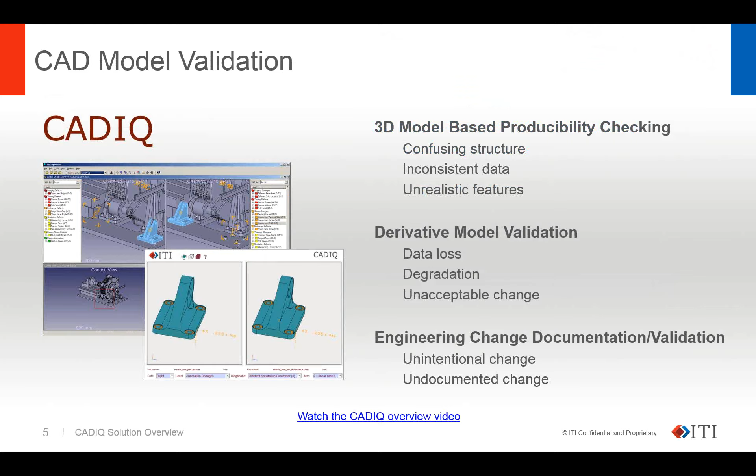But a good question that comes up at the beginning is, why would you want to validate your CAD files? And really, we'll go back to those three buckets to answer that question. First of all, CAD files, as you well know, can have defects in them, and some of those defects are caused by modeling practices, and other ones just little idiosyncrasies of the CAD tool and how it reacts to different types of geometry that you're trying to create.

So if you're using Creo and you have to share files with suppliers or customers that are in an alternate format such as STEP or any of the other formats out there, you want to be sure that the data you're giving those other contributors to your value chain is accurate, and there aren't any differences between what you have in your CAD tool and what appears in the derivative version of that.

And then finally, as models go through the process, or as designs go through the process of completion, there are a lot of different changes that happen. Some of those changes might be related to manufacturing, some of them are simply design changes to make the product function better, but whatever the case, the ability to see exactly what those changes are can sometimes be difficult to spot or difficult to communicate.

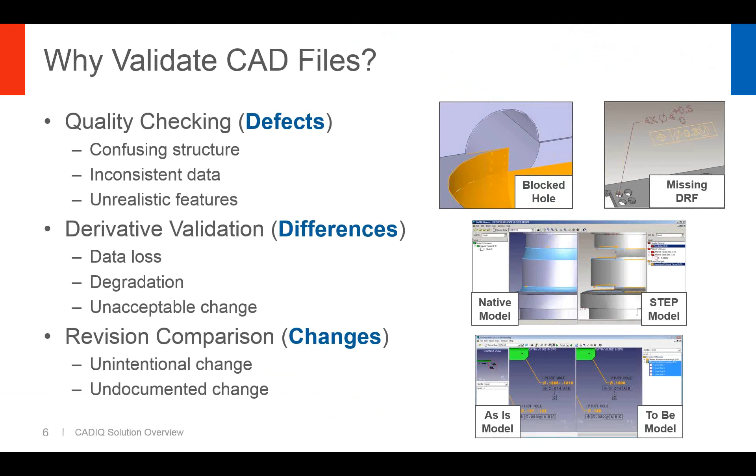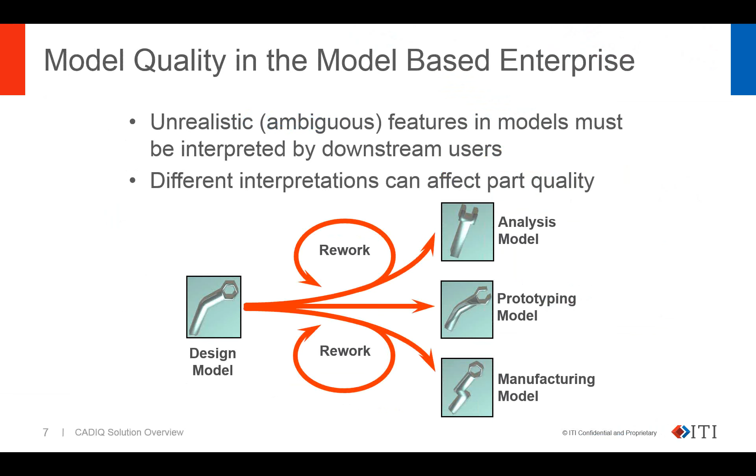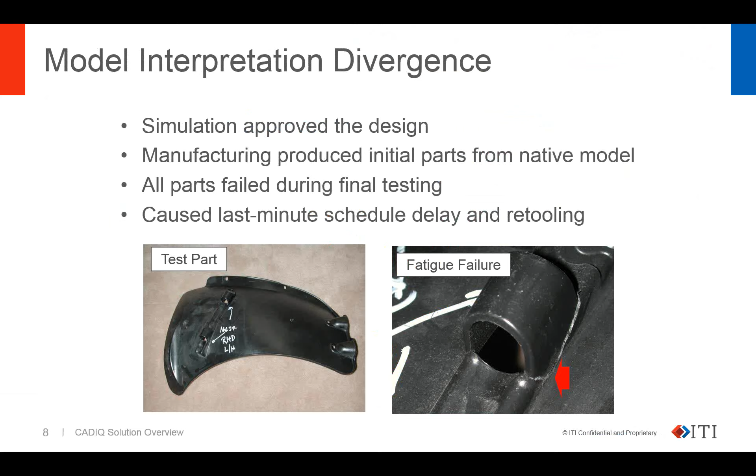We have a zoomed in view on the right-hand side where it shows some fatigue failure due to some stress concentration that happened on the part as it was placed in its functional environment. So let's take a look at what actually happened to that. And this gives you your first look in today's webinar at CADIQ and how it looks to the user. So what we're seeing here is a picture in CADIQ of a quality check where we're spotting a zero thickness surface, a little sliver, if you will, that can happen pretty easily in CAD tools when you have draft angles and radii and things like that coming together.

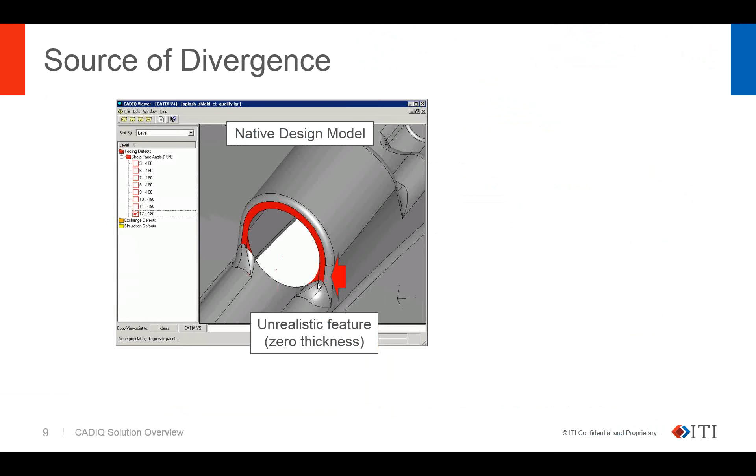You can often get little sharp edges. You notice that we have a radius in place there that would take care of that stress concentration, but as the product went through manufacturing and simulation, it got simplified a little bit to the point where that unrealistic feature actually was not accounted for in the simulation, but since manufacturing worked off the original model, we actually got a situation where we have no radius on the actual part that was built, and because of that, we have that stress concentration and a failed part.

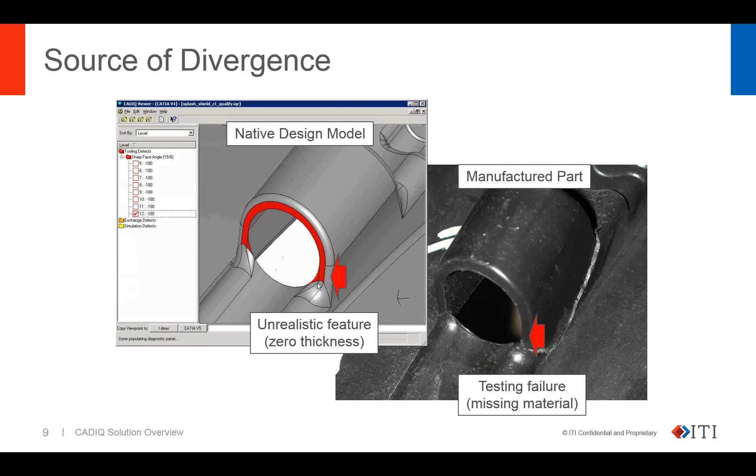So a tool like CADIQ can alert you to these kinds of issues with geometry that if you were to inspect this model visually and shade and spin it on the screen, you might not necessarily see these kinds of defects, and therefore you could be faced with a problem like we're seeing here.

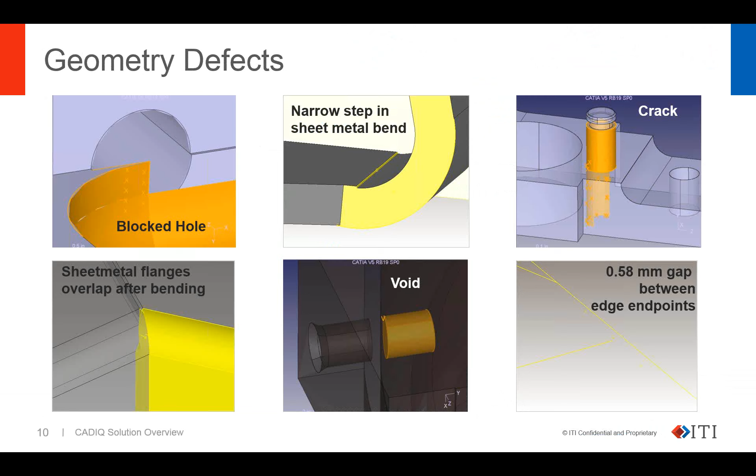That's what we call graphic PMI. There are a couple of terms that you may or may not be familiar with. One is graphic, the other is semantic when it comes to PMI. So graphic PMI just means that a human is going to look at that and interpret that information. This defect isn't important in that case, but if we're trying to program a coordinate measuring machine using this information, we then need semantic information, in other words, interpretable by a machine. And the machine interpretation of this is going to miss that surface that should be included in that profile.

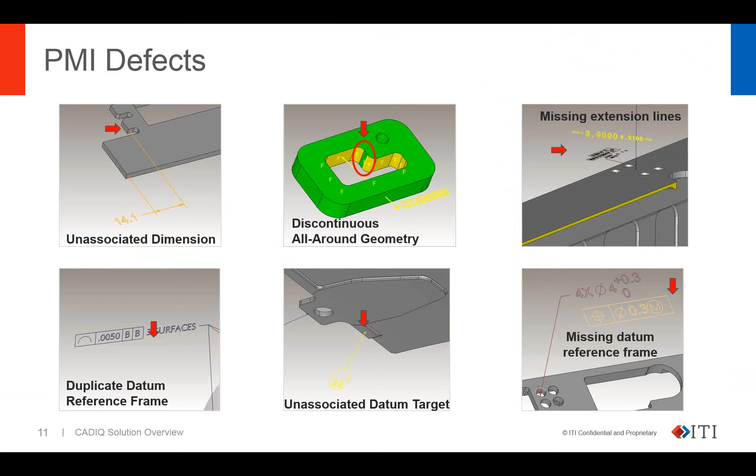We're going to kind of switch gears here and talk about derivatives. We were talking about individual model quality. Now we're going to change gears and talk about derivatives, meaning alternate formats that are produced from the original CAD model. Wherever you see the brown colored ovals here, that's an opportunity for a derivative to be produced, and also an opportunity for errors to be introduced in the data.

So as the data comes from a supplier or maybe from a legacy system into the CAD tool, you may have some translation that takes place there. And then downstream of the design tool, transformations may take place for visualization, for manufacturing purposes, or maybe for archiving purposes. And many times those three deliverables are in different formats. So the question becomes, are these models all equivalent? If we consider the model in the middle to be the actual master model, we want to ensure that anything downstream from that is going to be equivalent to that master model, so we don't have the kinds of problems that we saw with the example earlier.

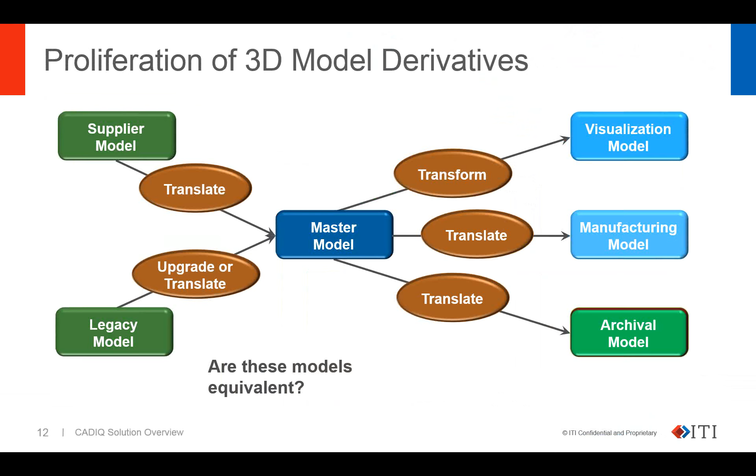So what kind of things can we spot in CADIQ? Here's another look at the user interface of CADIQ. And by the way, I will show a short demo at the end so you'll get a feel for what it looks like in real time. But here we're seeing the master model on the left and the derivative model on the right. And you can see here a significant difference between those two. And that's one that would likely be picked up on a visual inspection.

But how often do you really display your CAD model and your derivative model side by side? That doesn't in reality happen very often. We tend to trust that process, but we can see by this example, and I'm sure you've seen some examples in your day-to-day work, where derivatives actually are not equal to the original model. So here we're showing a rich graphical interpretation or visualization of that difference and giving you very clear information about what the difference is.

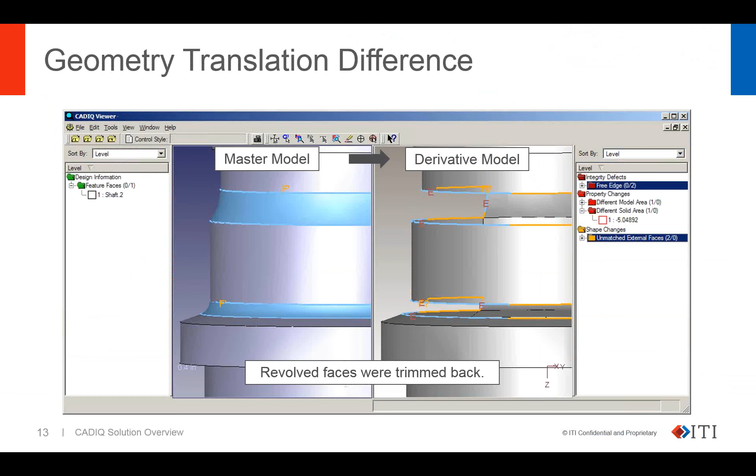Another example here is with respect to an assembly where we have a component of the assembly, everything's geometry is completely accurate, but the component of the assembly has changed position as a result of the translation to the derivative file format. So here, I'm not sure if we're seeing a step file on the right, but most likely it is. It's covered up by those labels. But here we're seeing that comparison, and we've got a component that has shifted. And the busier the assembly gets with components, the less likely it is that a person doing a visual inspection is going to see all of these potential changes that could happen.

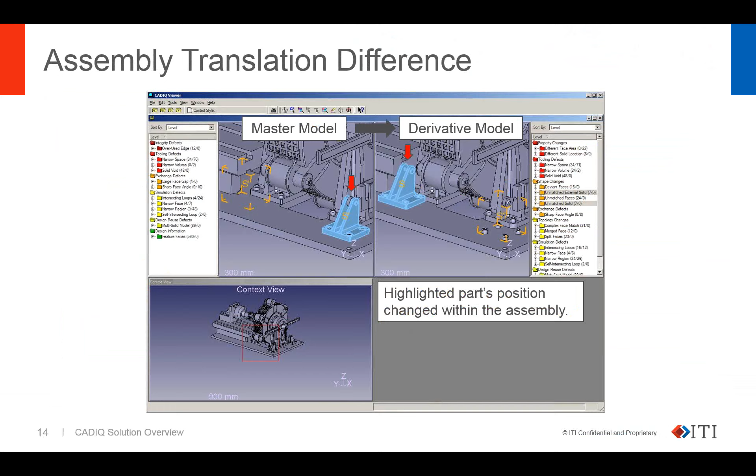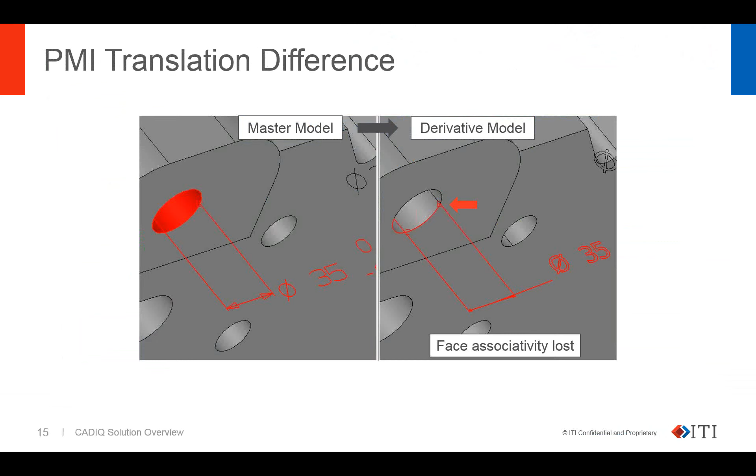Here we're looking at a difference in PMI through the translation process. So we see a couple of things happening here. The face associativity is lost. On the left-hand side, we could see we selected the dimension and the faces on the model inside the hole there are highlighted, and we've lost that associativity on the right-hand side. You can also see a change in the font there where we have sort of a block type font on the right, which is different than the font that was in the original model, which may not be as important. But again, if we're talking about that semantic PMI where we're going to use a program to interpret this data, then this loss of associativity becomes very important.

We also have here where there's actually some information missing. We had a statistical symbol in the PMI on the left, and that has disappeared along with some size changes and font changes in the PMI itself. So we look at these in terms of parts, assemblies, and PMI, comparing all of those things to make sure that what you get in your derivative file is equivalent to what you had in the CAD file.

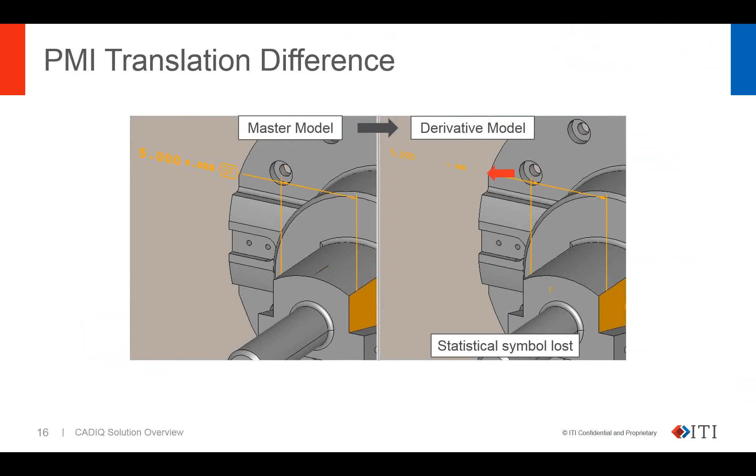Some other examples here where we've lost some cross-hatching in a view, the location of a balloon has changed, and in the bottom example, a circular balloon has changed into an octagonal balloon with facets on it there. So all these things can be spotted easily and highlighted with an automated tool like CADIQ, whereas the visual inspection may not catch all of these.

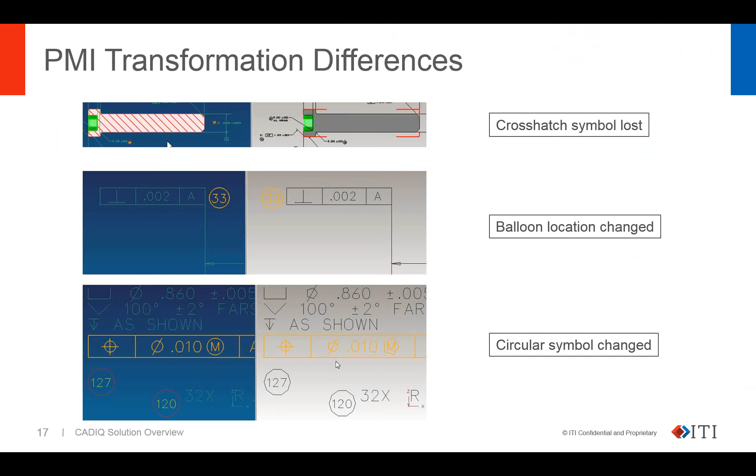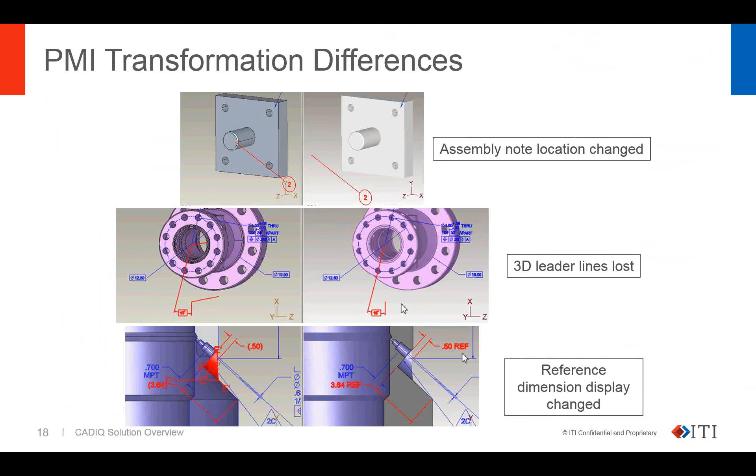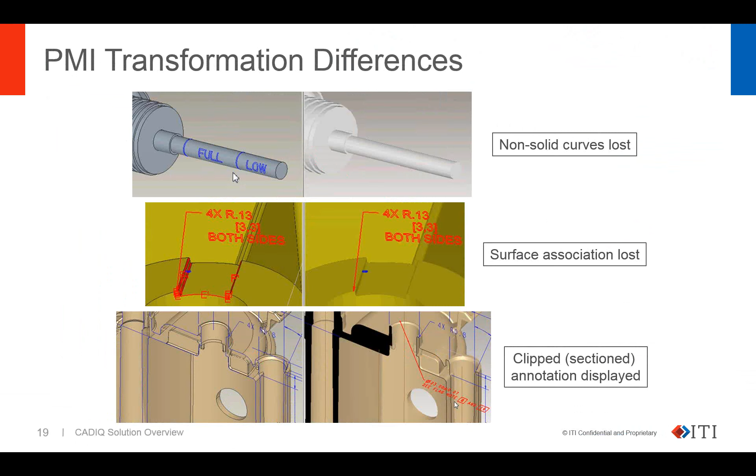And here's some other PMI differences where you can see the left and the rights are different, and I won't belabor the point and go through all those differences, but on looking at these images you can see that there are some differences between the left and the right which may not be immediately apparent on a visual inspection. And just a few more examples here with surface association being lost and different elements being lost in the process of translation.

Now the third, so we've talked about model quality, initial model quality, with features that are appropriate for the intended purpose of the model. Then we moved on to verifying or validating derivative formats of the model, and now we're going to shift gears again and talk about that third bucket or that third area where CADIQ provides value, and that is documenting or spotting model revisions.

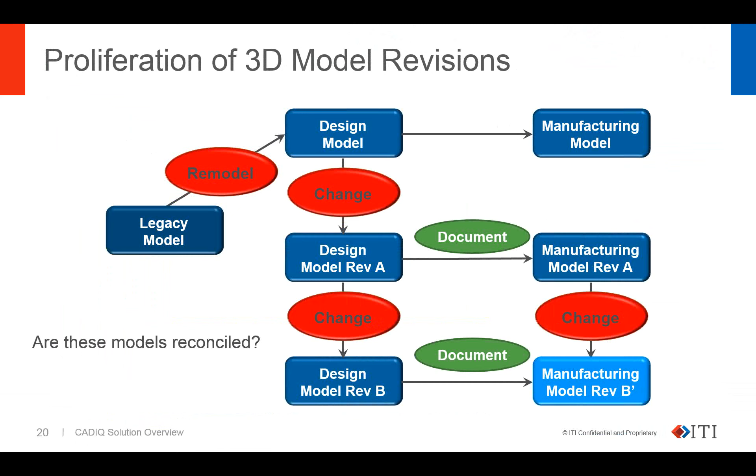So here, if I build this out, you can see like that graphic I had up before, we have a number of opportunities where changes might be made to the model. Starting over on the left, going from a legacy model to the current model, we may make some changes there. Changes may just be a result of different revisions of the model as it goes through the design cycle. There may be changes associated with manufacturing, and manufacturing may have a couple of different revisions of the model based on their process needs. So each of the red ovals represent an opportunity for change, and therefore also represent an opportunity for changes that either are unintentional or for whatever reason are undocumented simply because they weren't spotted or known about by all the parties involved.

So a couple of examples from CADIQ here then where we've got an as-is model on the left-hand side and the revised model on the right-hand side. Now, the idea here is that we've changed the thickness of the geometry. You can see the orange highlighted geometry there, and what has happened is the hole depth did not change with the rest of the model. So we're seeing some extra geometry down there at the bottom of the hole. And again, visual inspection, particularly if you have that model shaded, may not be immediately obvious and may be missed entirely, this type of a defect. I guess I won't call it a defect, but this change that actually does sort of result in a defect here based on the fact that that hole should go all the way through.

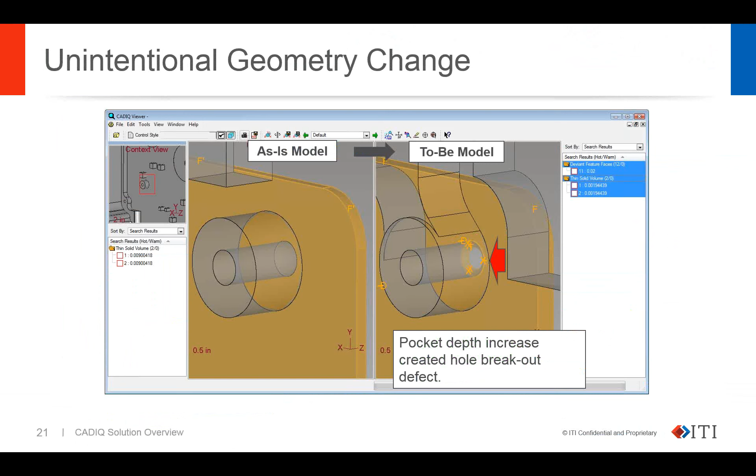Here we're looking at a composite layup where we have differences between the model, and it's pretty significant here. So these are pretty easily visualized. You see the composite geometry was changed. It was intentional and it was documented, but there were some attributes associated with that.

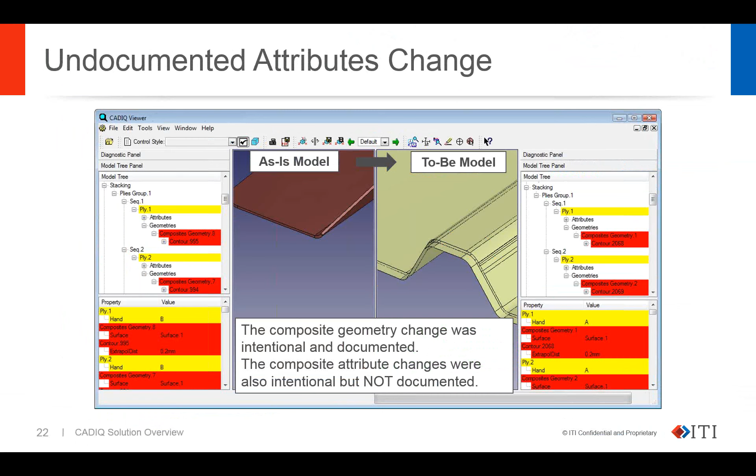In other words, text parameter type information that's not geometry that is captured with the model that may be very important for automated processes related to manufacturing, and those items were intentional, but they weren't documented. So CADIQ spots those and allows us to then somehow document those and communicate those to downstream users of this data.

Here we have, in the absence of a detailed drawing, we don't have a drawing to redline, so we give you the ability with CADIQ to actually produce a PDF. So one of the questions that actually may have come up in your minds as you've watched this is how do I communicate these changes? I find these things in CADIQ, and then how do I communicate that to the rest of my organization, most of which won't have access to the CADIQ tool? And the answer to that is that you can provide this information in the form of a PDF.

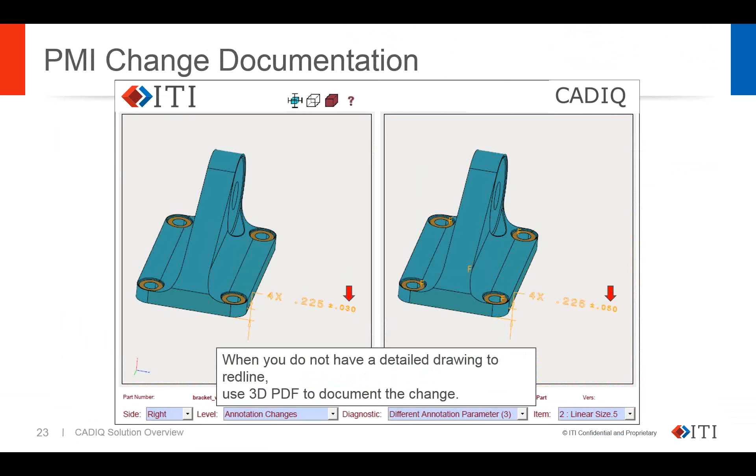So here you're seeing an example of that, and I also have a real, I'll say quote unquote, real example of that to show you as well. But all of the items that CADIQ spots can be included in this PDF report, and that gives you something that you can attach to the model and document the changes. And here again is one of those changes that might not be spotted immediately. We have a tolerance change from 30 thousandths to 50 and could potentially be missed by a human inspector.

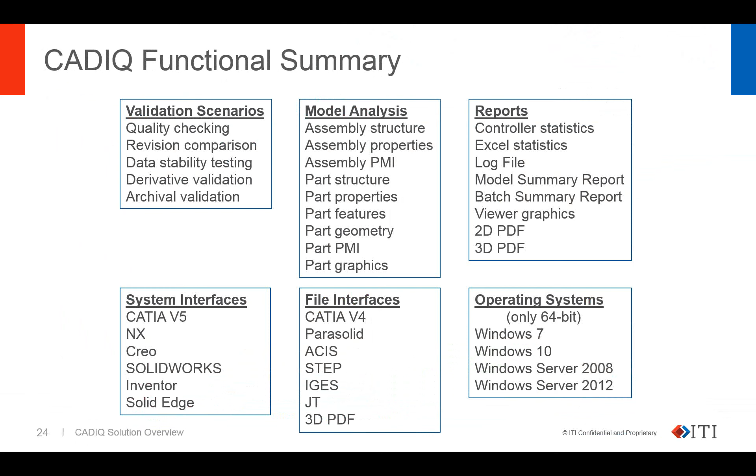And just as a summary, I won't read all of these, but this gives you an idea of the wide range of items that CADIQ inspects and gives us the opportunity to document with respect to the models and derivatives and revisions that you work with as you go through the design process. Probably most important to cover here is the system interfaces that we support, and you can see those in the lower left-hand portion of the slide, the CAD tools that we support for inspection of models in terms of quality, and then the different interfaces that we support for derivatives are listed there as well.

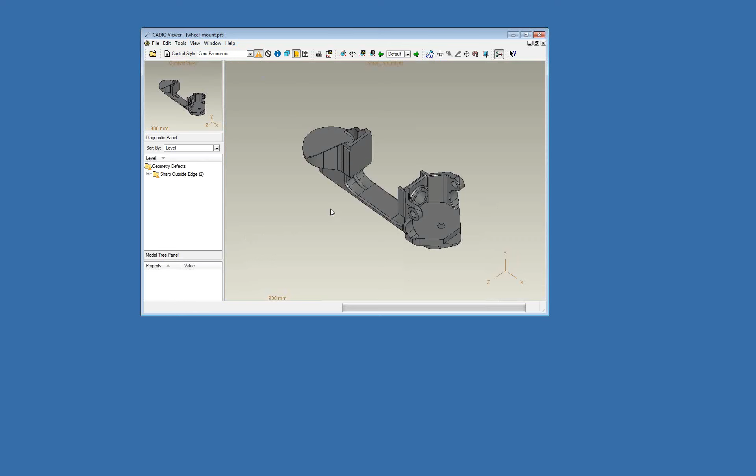Okay, so I'll take a few minutes now, and I'm going to switch gears here and change up the display a bit and show you what CADIQ looks like to the user. So here we've got a model where we're just showing, this is a quality check. So that was the first area that we talked about, showing defects in the model.

And just to give you an idea what that's like, well, let me back up here. The user interface is pretty simple here. You've got menus across the top, different icons that in many cases are duplicated in these menus, but different controls for displaying this model. For example, you could display it in wireframe if you want, or turn it on so that it's shaded based on what kind of information you're trying to query from this model that might be useful. We have an overall view up here in the upper.

I'm going to expand this bigger. Actually, that went way too big and spread across all three of my screens, so I apologize. I'm going to try to resize this thing. There we go. I'll stretch it out. I hit the maximize button and I have three monitors and it's spread across all three of them.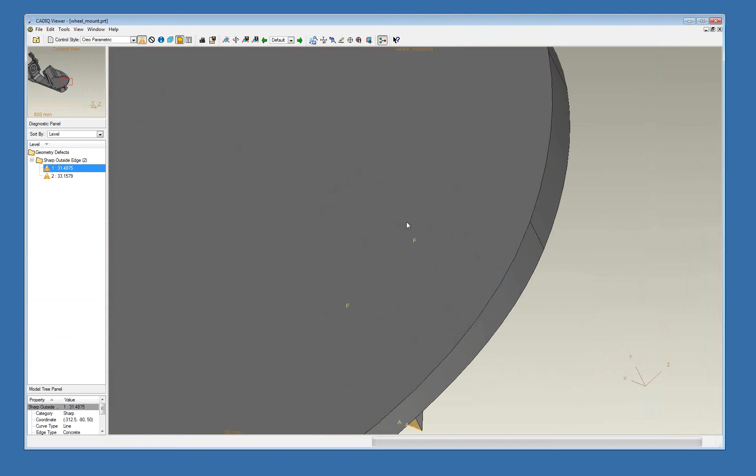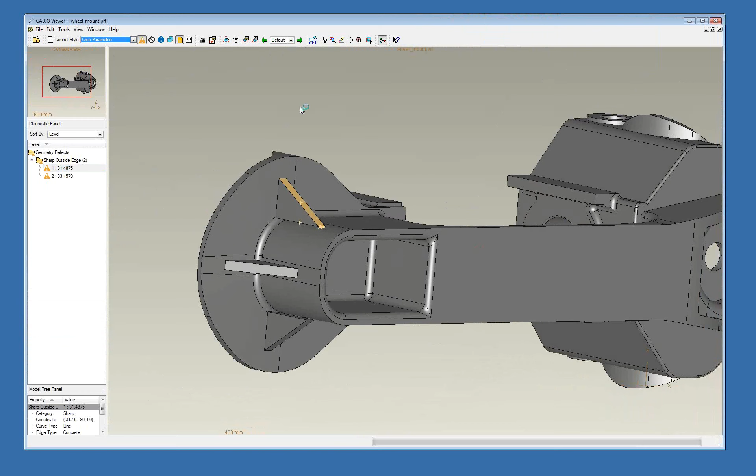So what we have here is an overall view of the model. So for example, if I zoom up on one of these items that CADIQ found, I see a zoomed up view of the model in the main screen, and this overall context view that we see in the upper corner here on the left tells me where I am in the model. And I can use the mouse wheel to roll back and forth and manipulate this model in different ways. By the way, if you're used to the way a specific CAD tool behaves, like for example, Creo, that's why I've got the control style up here set to Creo, but you can set it to any of these different CAD tools. And then when you're reorienting the model in CADIQ, you're going to have those familiar controls that work the same way as they do in the CAD environment that you're used to.

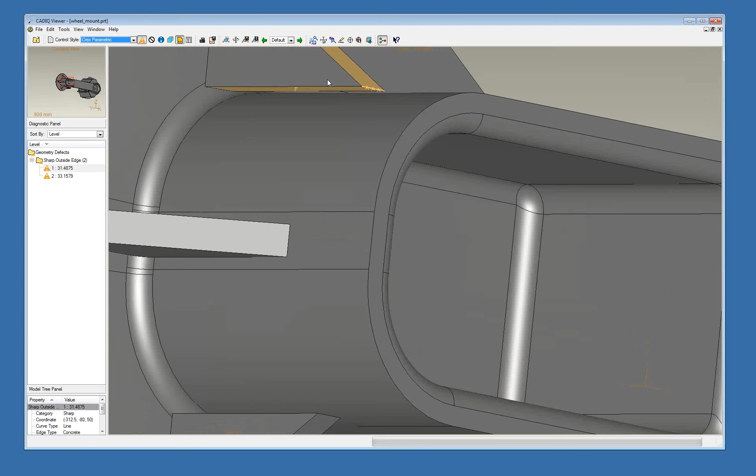So let's just zoom up here and take a look at what's going on. We have a sharp outside edge that CADIQ spotted. As you look at this model, as I rotate it around, there might not be anything obviously wrong until you get to this angle, where we can see this reinforcing rib doesn't actually touch the side of the part, and it results in what CADIQ finds as a sharp edge on the model.

Again, one of those things that when we're zoomed back like this, everything looks pretty good unless we look closely at it. So that might be missed, and you can imagine what kind of difficulties this would cause in creating tooling or machining this model. Now you might also be asking, how do I tell CADIQ what to change or what to spot, and can I adjust what CADIQ thinks is important based on what I think is important?

The answer to that question is in a set of configuration files that you can edit to configure CADIQ to ignore certain things that aren't important in your environment, or among those things that are important, maybe some are more important than others, so you have CADIQ mark those as more severe conditions. We refer to those as hot, warm, and cold, or if you want to use a traffic light analogy, it could be red, yellow, green, green being good, and on down to red being a significant item that needs to be fixed.

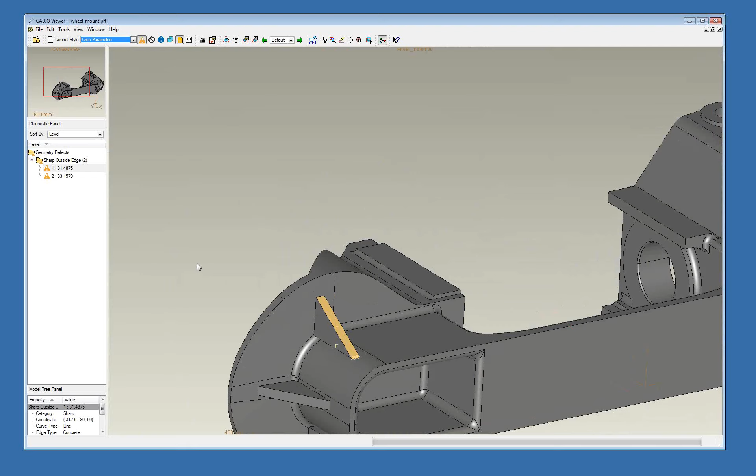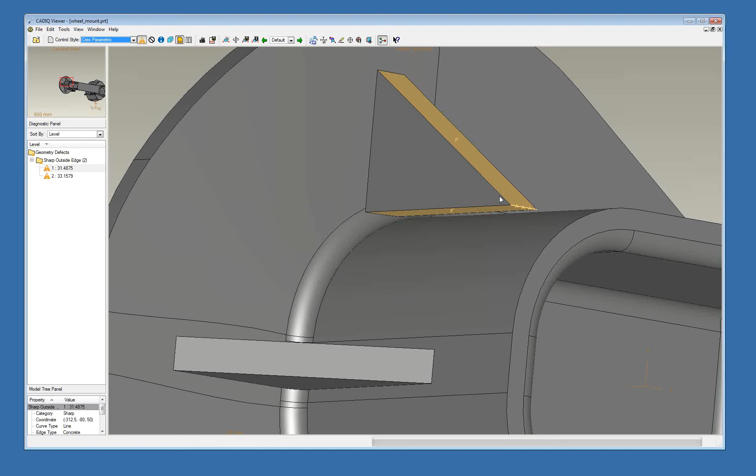So within those items that you do want information about, you can set different thresholds, so that what is considered a sharp angle in one company's environment may not be a sharp angle in another. So let's say this angle is 30 degrees here, and I set the threshold in CADIQ to say any angle that's 31 degrees or less is a sharp edge. It's going to spot that. But if I set that tolerance to be some different number that's higher than what I have here, or lower than this, then it wouldn't spot this as a problem. So the bottom line is you can configure CADIQ based on what's important for you to know about your models.

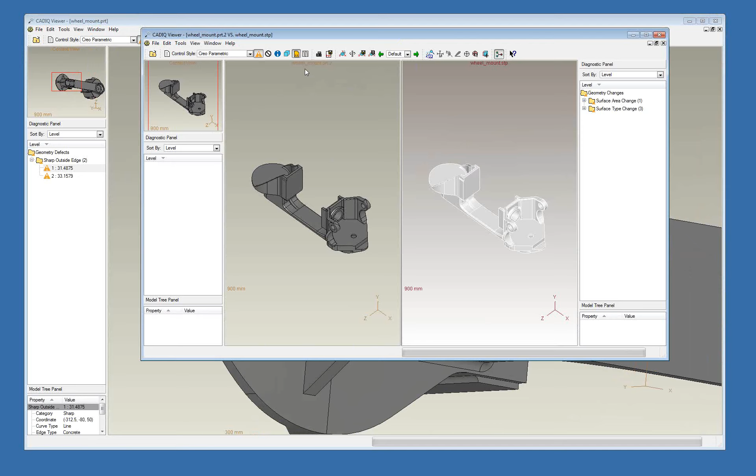Okay, so another example then, moving on to changes in a model. Here we have a derivative validation. I'm going to collapse that one window and make this a little bit bigger. So here we're looking at the differences between a part file and a step file. I'm not sure how it's coming through in WebEx, but at the top of each of these windows is the name of the model we're looking at. So we have a .prt on the left, and a step file on the right.

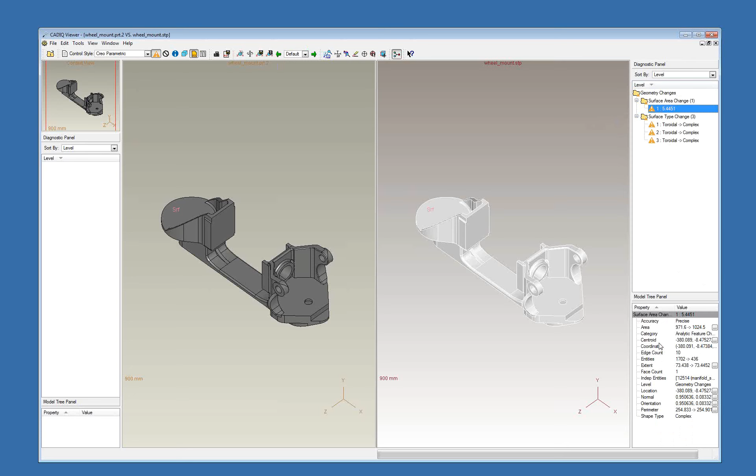And over in the panel, you can see the different items that CADIQ found in terms of geometry changes. If we expand these, we can see what they are. And as I highlight those, I also want to point out that there's a properties panel down here in the bottom right-hand corner that gives you a rich set of information about that change. Some of it may be very important, some of it may not be important depending on your application, but there's a nice set of information there that can be useful. Now, to zero in on changes specifically, you simply double-click that item in the tree,

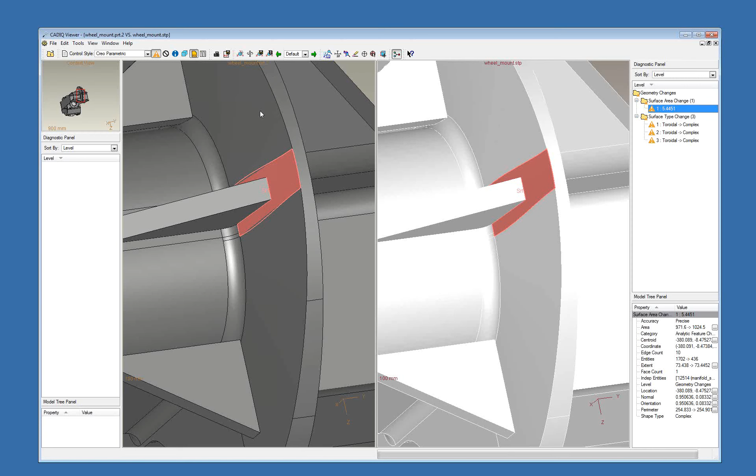and what we can see here is that we have a surface area change between the step and the part file. There are a couple of different ways it's shown. First of all, if you look over at the left-hand panel where we have the CAD model, you can see overlaid in wireframe is the step surface. The shaded surface is the surface that exists in the CAD model. We've overlaid the surface that resulted in the step file, and you can see there's an area change there.

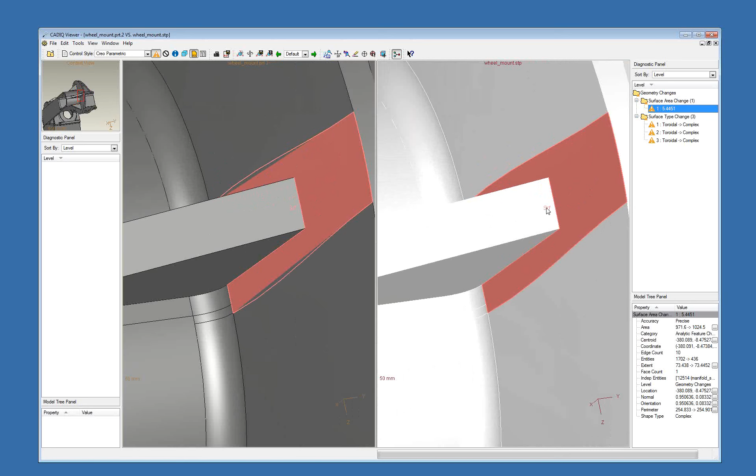And to get more information, you can either look over here in the diagnostic panel and see what that area change was right here in the list, or if you simply hover over the label of that surface, you can see the percentage of the change there. So we're just about 5.5% difference between the surface area in the CAD model and the surface area in the step model. Now that doesn't necessarily represent a change in position of that surface, but the construction as it happened in the step file is slightly different. We can also see that some surfaces, based on the translation algorithms, I guess you could call them.

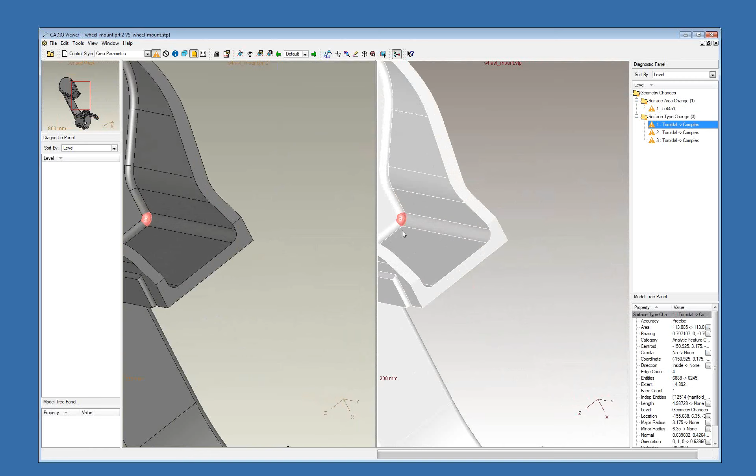I don't know how STEP does all these things internally, and I don't know all the mathematical terminology, but if it is important in your machining applications or other applications, maybe analysis applications, that this surface be of a certain type, we can see here that where it was a toroidal surface in the CAD tool, it became what STEP calls a complex surface. So if the entity types that you get in the STEP file are important to you, this is information that can be useful for making adjustments to your STEP file translation process, or simply being aware that there's a difference between these two formats.

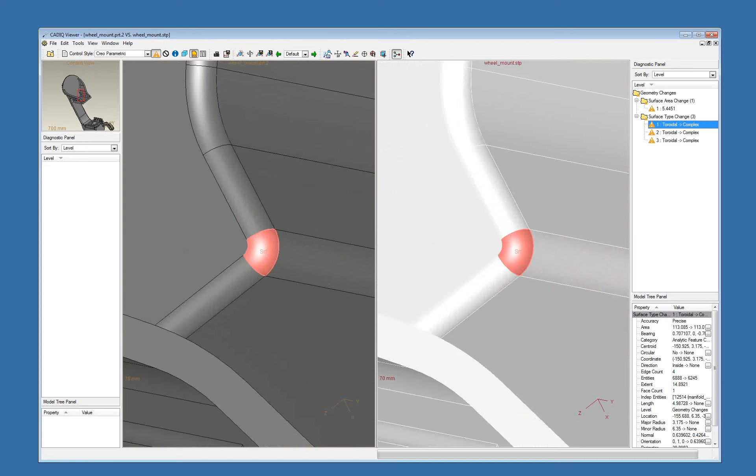Okay, and then the third example, I'll go ahead and collapse this down. Third example is comparing one revision of the model to another revision of the model. And again, I'm not sure how well this shows in WebEx, so I'll point out the fact that we have on the left side wheelmount.prt, and then we have wheelmount.prt.2. That would be the revision. And we're seeing those side by side, of course.

And as I mentioned before, this side by side visualization capability is really powerful. Again, I'll pose the question sort of rhetorically: how often do you really look at two models side by side in your CAD tool? You may do it frequently, but I've been around the industry for a long time, and I don't know of too many customers or users who actually do that very often. Usually it's a matter of markups and things like that. So here we're seeing two versions of the CAD model, and over in the panel on the right hand side, we're seeing what the changes were.

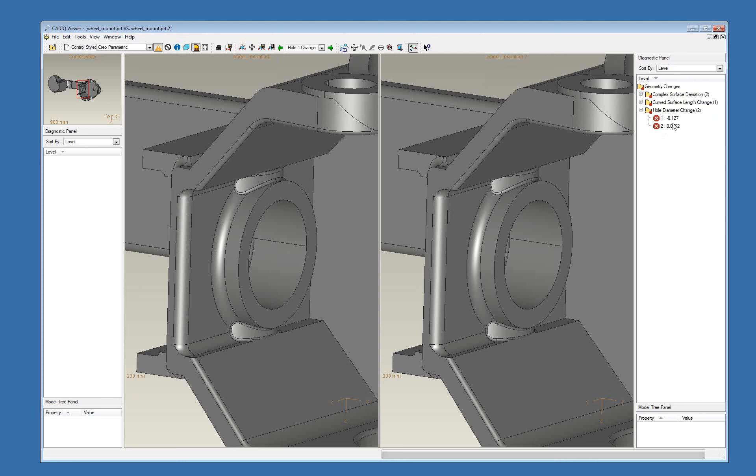So we've got three different categories here. We'll focus on a couple of them. First of all, I have a hole diameter change, two different indicators of a hole diameter change. And let's just double click on the one and we'll see where that is. We can see that this large hole in the central portion of the part there has changed diameter by 0.127. And again, looking down in the properties panel, we can see not only that diameter change, but other pieces of information about the position and condition of that cylindrical surface there.

By the way, I don't see any questions at this point, but if you're asking in your mind, what does CADIQ know about the features on the model? The answer is that we're analyzing only geometry here. So while we do use the CAD system to generate this geometry and to extract it from the CAD tool, we're only evaluating geometry, and we don't care if this is a hole feature or a round cut or an extrude or a revolve. That's important on the CAD side, but in terms of comparing revisions, only the geometry in terms of size and position is important. So that's what we're focusing on here.

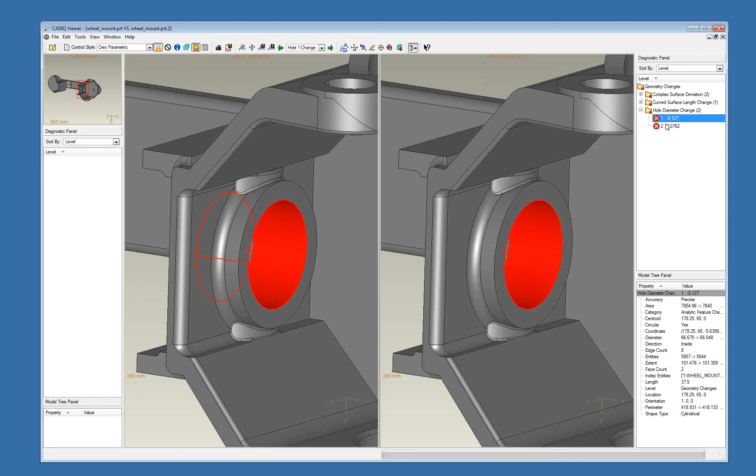Now, just like before, we can see the difference highlighted in the tree, but you can also hover over the label and we'll see that the diameter change is listed right there with that feature. Now let's look at the other one here. It's actually on the other side of the part. I'll zoom out a little bit. That zoomed up pretty far there. Let's kind of go over here to the other side.

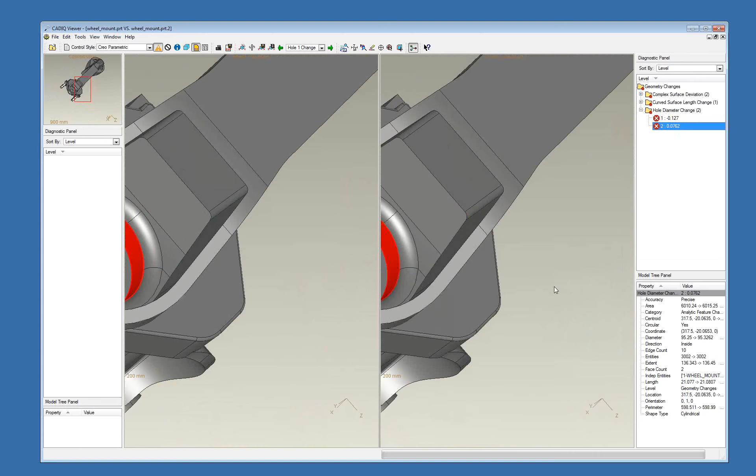And I mentioned before the idea of how do we share this information outside of the CADIQ user community, which tends to be fairly small, right? You're probably not going to have every CAD user in your organization evaluating models using CADIQ, but you will want to communicate that information perhaps to a very wide audience. And the way that's handled is when you are looking at the results in CADIQ, you have the ability, a couple of different ways to do it, but I'll just highlight one right now. Right up here, I have a Save as PDF button. Now, I can generate several custom views by zooming and rotating and capturing those views, and then include those views in the PDF report. And that's what I've done for the example that I'm going to show you now.

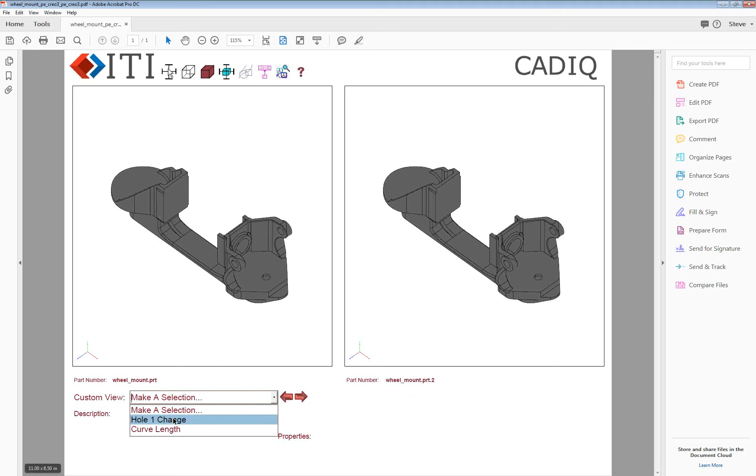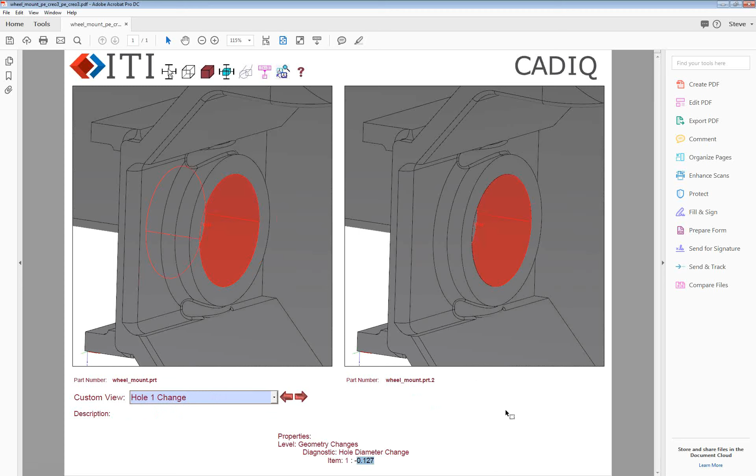I labeled these when I was in CADIQ generating this, but if I want to see the change for what I've referred to as hole 1, I can highlight that view. The part orients and zooms to the appropriate position, and then down here in the properties area, I can see that change where the hole got smaller by 127 thousandths, or about 1/8 of an inch. Then we also have one I actually didn't highlight in CADIQ, but we also have a curved surface length change.

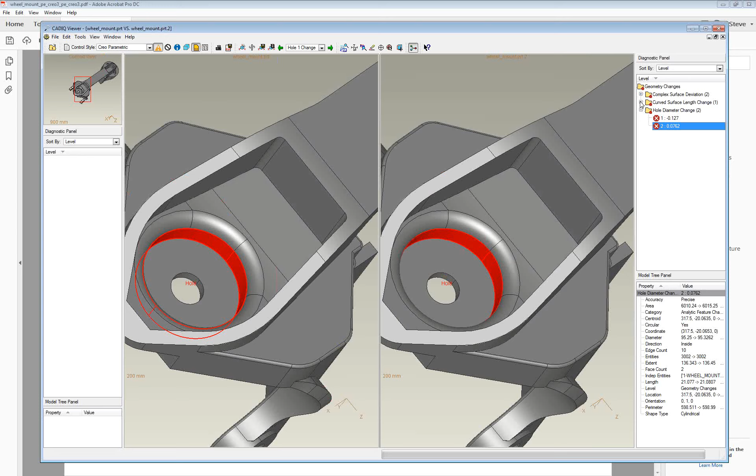Now I am going to jump back over to CADIQ since we have a couple of minutes to explain that one a little bit better. So let's go here to this curved surface length change. And really what we're seeing here is CADIQ showing us not only the fact that this hole diameter change, this one right here in the list, but as a result of that diameter change, another piece of geometry actually changed on this part as well.

And that would be this radius surface. It got smaller as the hole diameter got smaller. Whichever way you go, smaller or larger is going to have the requisite impact. But we can see that not only did the hole change, but it's rather obvious, right, to those who use a CAD tool very often, that if you change this hole diameter, the diameter overall of this rounded surface is going to move with the edge of that hole.

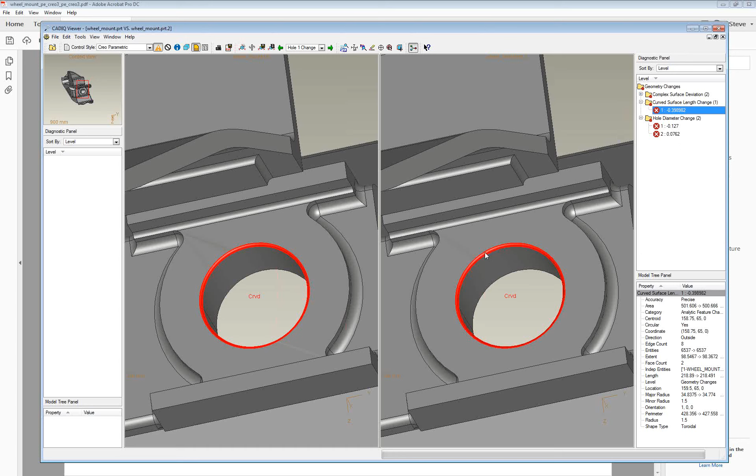So just to show you that CADIQ looks at these things from a number of different angles and documents every geometrical change. Some, like this one, may not be so important to point out, but it speaks to the thoroughness with which we evaluate the models and to the level of detail that you can get to if it's important. So this curved surface length change, I captured as a view here in the PDF file so that you see an example of that, and how much that changed as a result of the diameter change of the hole.

Also, if you have access to the Acrobat authoring tool, you can customize these PDF templates to have your company logo on them and to have different pieces of information. You might have an ITAR statement or some other sort of proprietary statement you want to include so that when you distribute them, they're adequately documented, what kind of protections you need and that sort of thing. So all of that is doable outside of CADIQ by editing the templates that we provide. And then, of course, you'll get that customized information when you generate the report.